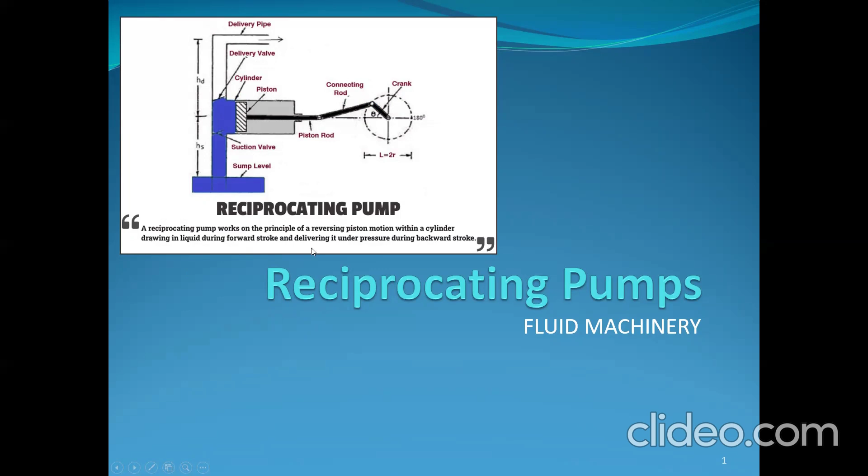Reciprocating pumps - here in the pictures are the pump parts. A reciprocating pump works on the principle of a reversing piston motion within a cylinder, drawing in liquid during the forward stroke and delivering it under pressure during the backward stroke.

Introduction. There are two main types of pumps, namely dynamic and positive displacement pumps. Dynamic pump consists of centrifugal, axial, and mixed flow pump. In these, pressure is developed by the dynamic action of the impeller on the fluid, and momentum is imparted through this dynamic action.

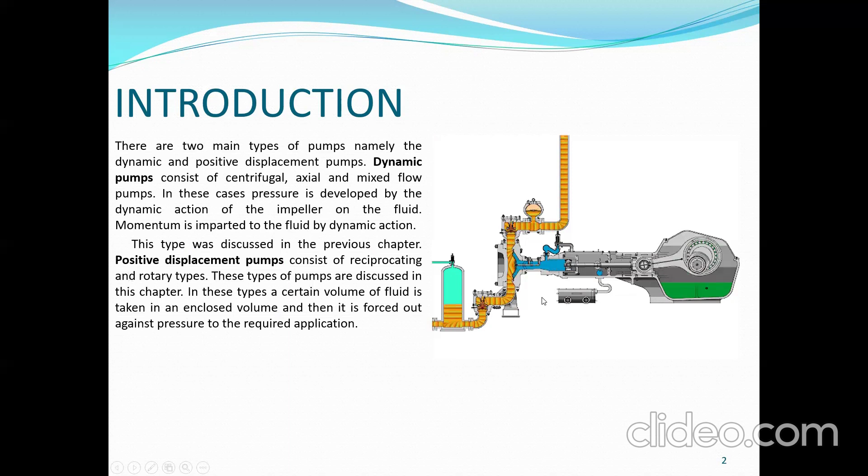This type was discussed in the last topic. Positive displacement pump, as shown, consists of reciprocating and rotary types. This type of pump is discussed in this topic. Here, a certain volume of fluid is taken into an enclosed volume, and then it is forced out against pressure to the required application.

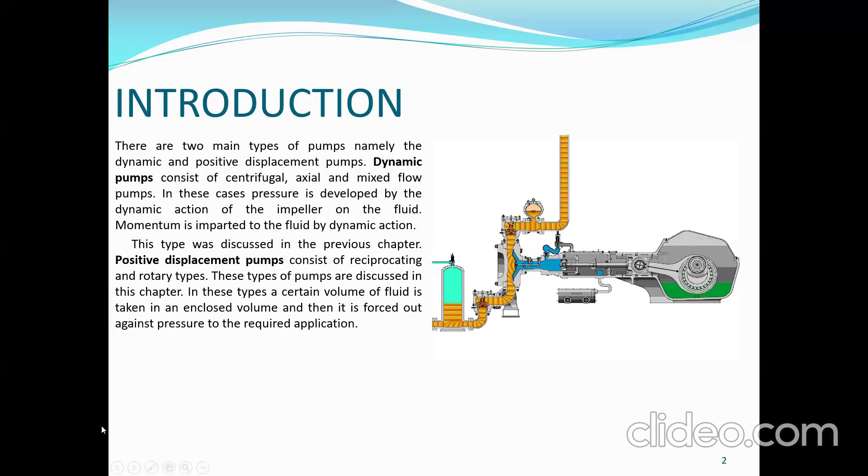Description and working principles. The main components are: one, cylinder with suitable valves.

The valves - delivery valves, inlet valves - put here, connecting rod, and air vessel. This is the air vessel, for expansion and contraction.

Two, plunger or piston with piston ring - here, the piston ring prevents leaking. Then connecting rod and crank mechanism - remember your machine elements.

Four, suction pipe with one-way valve - here's the suction pipe, and its one-way valve is the foot valve. Delivery pipe - here's the discharge. Air vessel reduces flow fluctuation and reduces acceleration head and friction head.

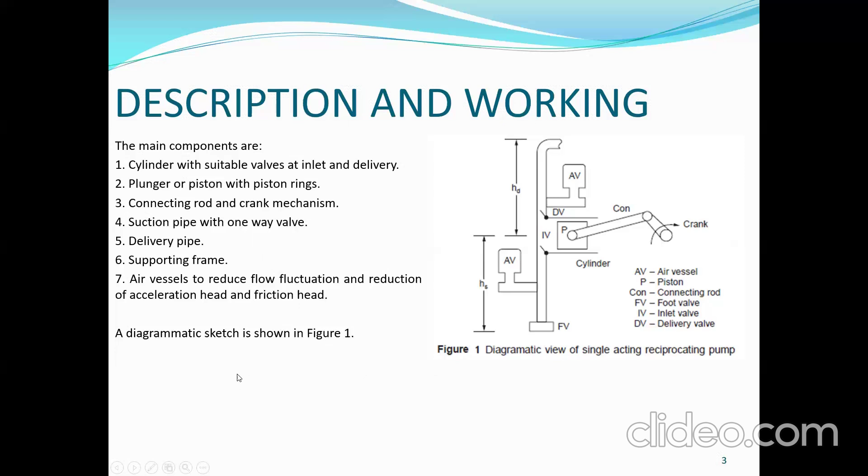So a diagrammatic sketch is shown in Figure 1. The action is similar to that of a reciprocating engine.

As the crank moves outward, the piston moves out, creating suction in the cylinder. Due to the suction, water or fluid is drawn into the cylinder through the inlet valve. The delivery valve will be closed during this outward stroke.

During the return stroke, as the fluid is incompressible, pressure develops immediately, which opens the delivery valve or discharge valve and closes the inlet valve. During this return stroke, fluid is forced out of the cylinder against the delivery side pressure.

The functions of the air vessel will be discussed in a later section. The volume delivered per stroke is the product of piston area times stroke length. In a single acting type of pump, there is only one delivery per stroke per revolution - one side only.

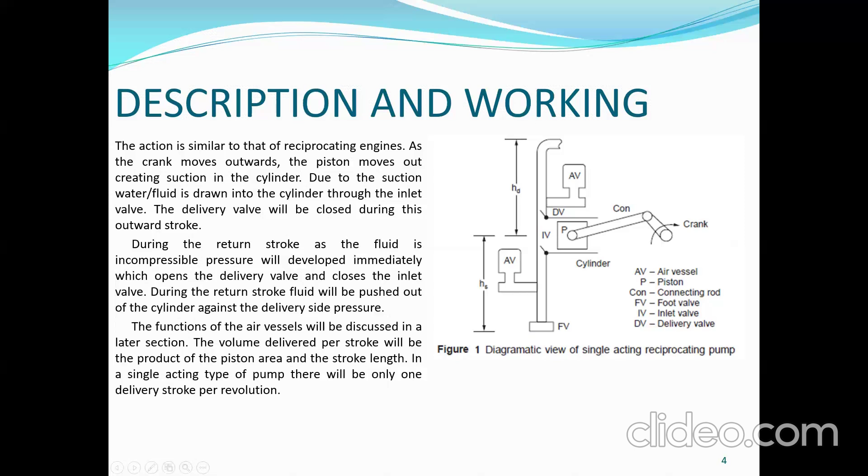Suction takes place during half a revolution and delivery takes place during the other half. As the piston speed is not uniform while the crank speed is uniform - since the piston motion is linear - the discharge will vary with the position of the crank.

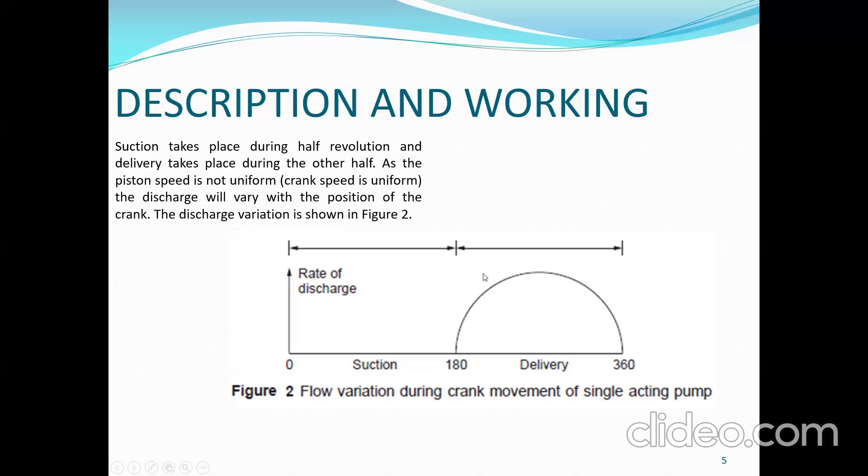As shown in Figure 2, the discharge variation or rate of discharge - in a single acting pump, the flow will be fluctuating because of this operation. This fluctuation can be reduced to some extent by a double acting pump or multi-cylinder pump, since it gets balanced.

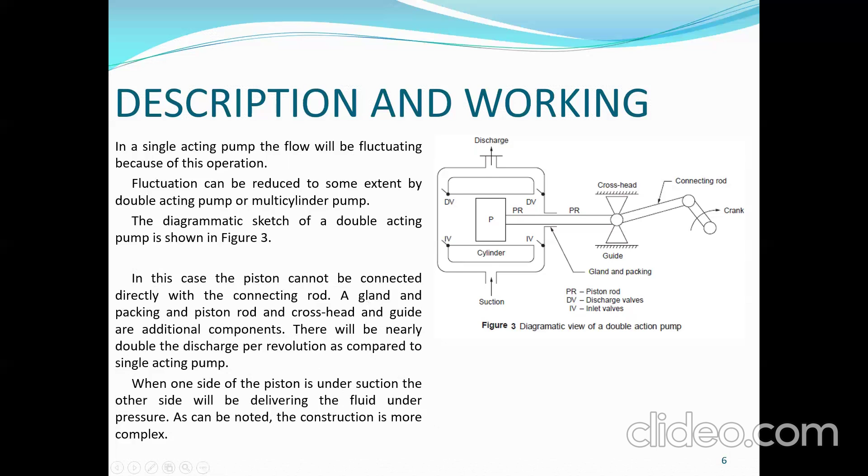A gland and packing, piston rod, and crosshead and guide are additional components. There will be nearly double the discharge per revolution compared to a single acting pump, since the volume is doubled. When one side of the piston is under suction, the other side will be delivering fluid under pressure. As can be noted, the construction is more complex.

Next, the flow rate and power. The theoretical flow rate per second for a single acting pump is given by Q = LAN/60 cubic meters per second, where L is the length of stroke, A is the cylinder or piston area, and N is the revolutions per minute. That's the reason we have 60, because the output is in cubic meters per second while N is in RPM, which is per minute.

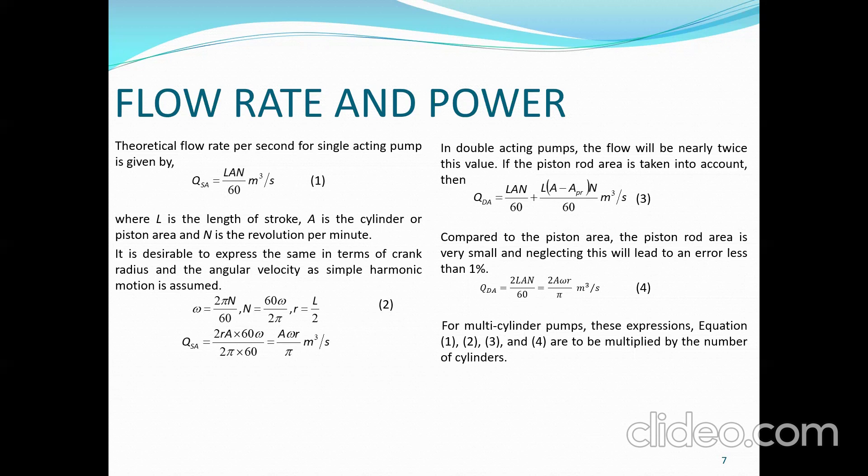Next is slip. Slip kasi may nag-ano siya, may velocity. There can be leakage along the valve, piston rings, gland, and packing, which will reduce the discharge to some extent. So this is accounted for by the term slip, yung reduction yan. Percentage of slip is QTH minus QAC over QTH times 100%, where QTH is the theoretical discharge given by equation 1 and 2, and QAC is the measured discharge, actual. The coefficient of discharge CD is equal to QAC over QTH.

Theoretical power now is mg times HS plus HD, in watts. Okay, hindi yan times W, in watts. Okay, ano? MGH. Okay, correct, that this is mg times HS plus HD in watts.

Okay, so it has been found in some cases that QAC is greater than QTH due to operating conditions. In this case, this slip is negative slip. When the delivery pipe is too short or the delivery head is small, discharge head, delivery means discharge, is small, and the accelerating head in the suction side is high, the delivery valve is found to open before the end of the suction stroke and the water passes directly into the delivery pipe. Such a situation leads to negative slip.

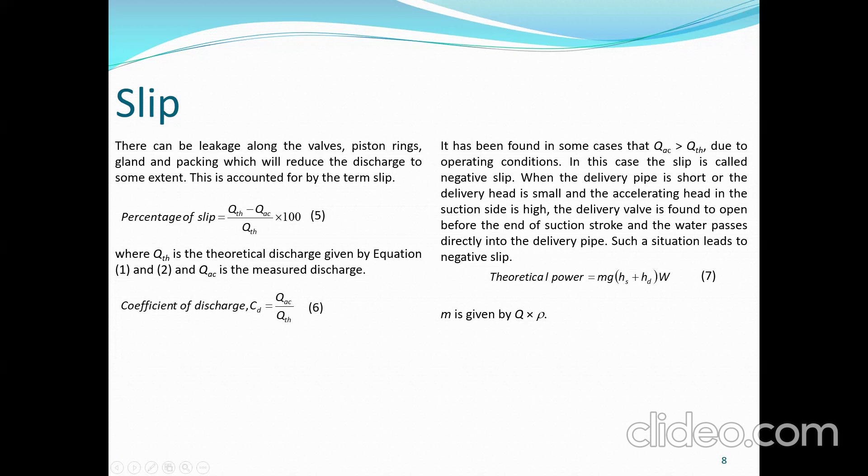Yan, so example number 1. A single acting reciprocating pump has a bore of 200 mm and a stroke of 350 mm and runs at 45 RPM. The suction head is 8 meters and the delivery head is 20 meters. Delivery means discharge head. Determine the theoretical discharge of water and the power required. If the slip is 10%, what is the actual flow rate?

So given, bore is D is equal to 200 mm or 0.2 meters. Stroke is L is 350 mm or 0.35. N is equal to 45 RPM. HS is 8 meters, HD is 20 meters. Slip is 10% or 0.1. Required: theoretical discharge QTH, power required, and actual flow rate QAC.

So theoretical volume, solution, QTH equal to LAN over 60 is equal to 0.35 times pi over 4 times 0.2 squared times 45. So Q is equal to 8.247 times 10 exponent negative 3 cubic meter per second, times 8.247 liters per second. So the power is mg times HS plus HD is equal to 1 minus 0.1 times 8.247 times 9.81 times 20 plus 8. Oops, okay wait, tara may mali sa ano to.

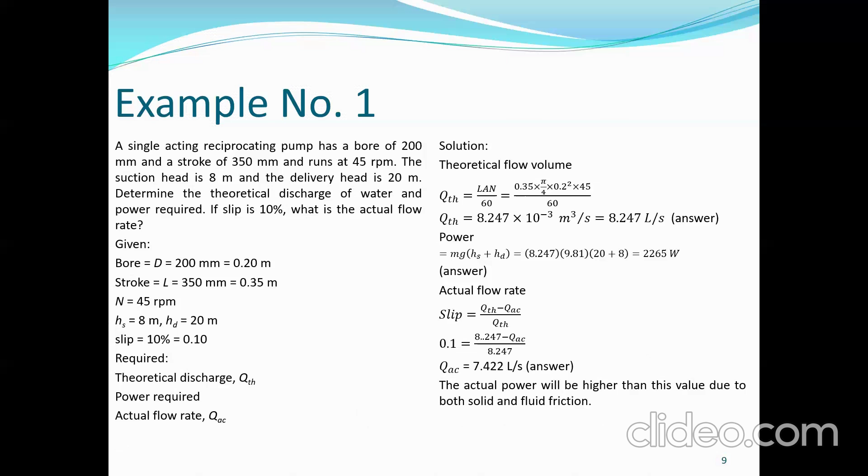Example yata to, pero yun ang mali niya doon. Kasi power, ano siya eh, power input.

Example sa book. Next, example number 2. A double acting reciprocating pump has a bore of 150 mm and a stroke of 250 mm and runs at 35 RPM. The piston rod diameter is 20 mm, the suction head is 6.5 meters, and the delivery head or discharge head, other reference, other books, is 14.5 meters. The discharge of water was 4.7 liters per second. Determine the slip and the power required.

Given bore D is 150 mm or 0.15 meters, stroke L is 250 mm or 0.25 meters, and N is 35 RPM. Piston rod diameter is 20 mm, equal to 0.02 meters. HS is 6.5 meters, HD is equal to 14.5 meters, QAC is equal to 4.7 liters per second. Required the slip and the power required. Solution. So this is a double acting pump.

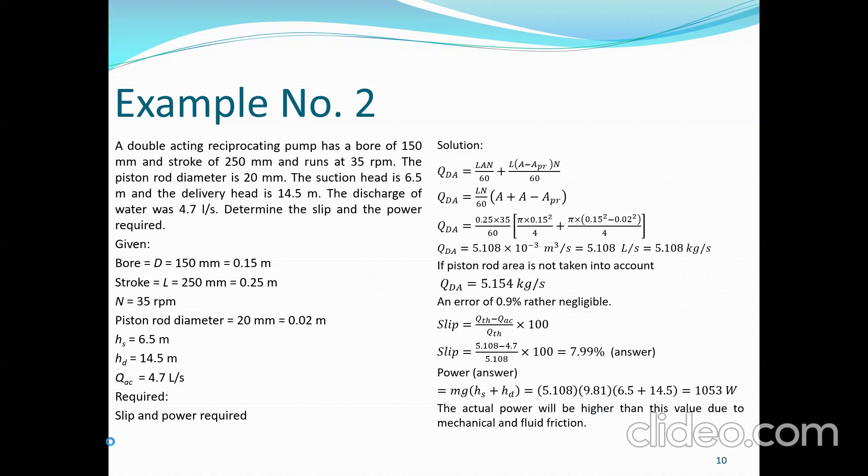Next, indicator diagram. So the pressure variation in the cylinder during a cycle consisting of one revolution of the crank, when represented in a diagram, is termed as indicator diagram. The same is shown in figure 4. So andyan yung

HT, atmospheric pressure, plus what G? HD is equal to delivery pressure or discharge pressure, and HS is the suction pressure. Suction is below atmosphere kadalasan. So the figure represents an ideal diagram assuming no other effects are involved except the suction and delivery pressure.

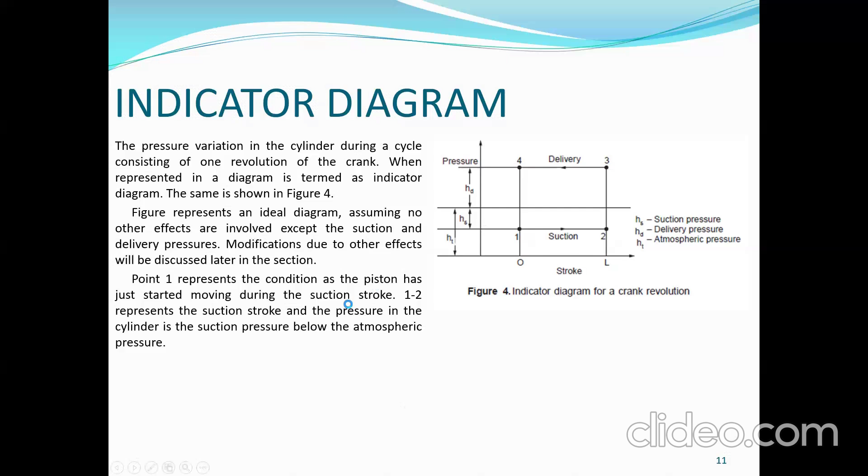Modification due to other effects will be discussed later. So point 1 represents the condition as the piston has just started moving during suction. So 1 to 2 represents the suction stroke, and the pressure in the cylinder is the suction pressure below atmospheric pressure. So, di pa siya nag-increase. Suction siya, papasok pa lang. Point 3 represents the condition just as the piston has started moving when the pressure increases to the delivery pressure.

So, nag-move na siya, compress siya. Along 3 to 4, representing the delivery stroke, the pressure remains constant. So, discharge na siya. The area enclosed represents the work done during a crank revolution to some scale. So, siyempre yung scale mo, para makuha mo yung area, susukatan mo lang siya.

So, power is equal to Q rho G times HS plus HD, is equal to rho G LAN times HS plus HD over 60. Take note, ang rho mo dyan, ang unit is kilogram per cubic meter or slugs per cubic foot. Okay? Pag rho G or gamma, equivalent sa gamma, weight density, that is pounds per cubic foot or newtons per cubic meter.

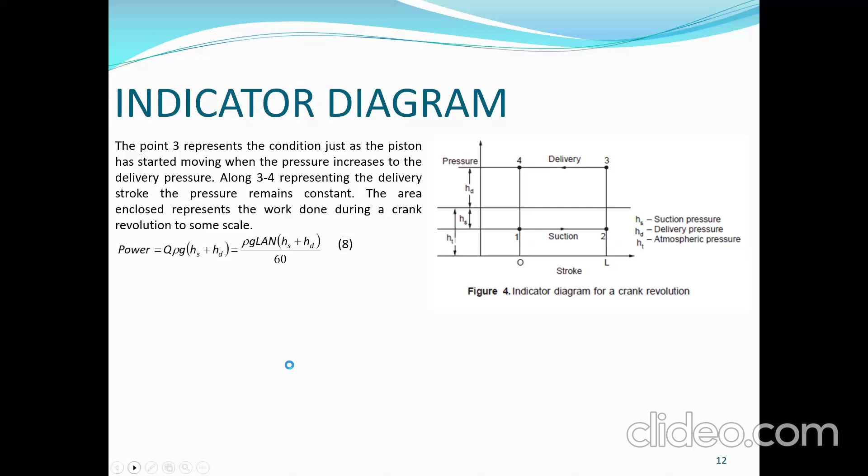Next is the acceleration head. This is needed for the actual performance of the reciprocating pump. The piston and the reciprocating pump has to move from rest when it starts the suction stroke, hence it has to accelerate. The water in the suction pipe, which is also not flowing at this point, has to be accelerated.

Such acceleration results in a force which when divided by area results in pressure. When the piston passes the midpoint, the velocity gets reduced, so there is retardation of the piston together with the water in the cylinder and the pipe.

This again results in pressure. These pressures are called acceleration pressure and noted as head of fluid, h, equal to P over rho G for convenience. Referring to figure 5 shown below, the following equations are given.

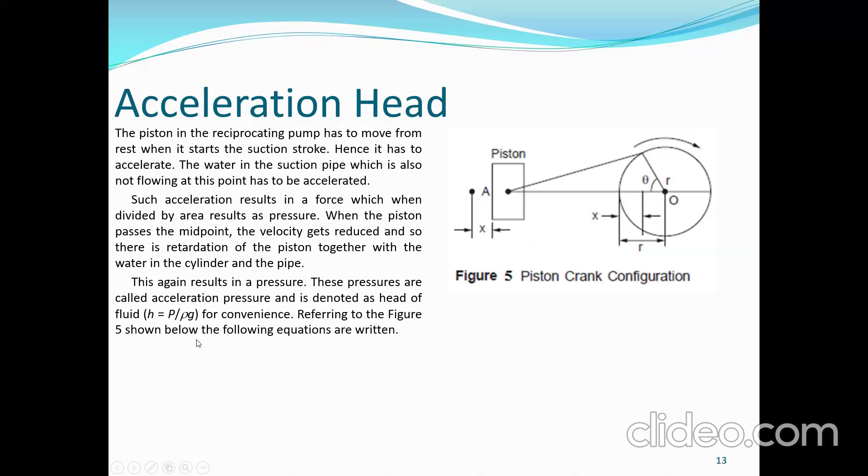Let omega be the angular velocity, then at time t, the angle traveled theta is omega t. So distance x equals r minus r cosine theta. The velocity at this point, v, equals dx over dt, equals r omega sine omega t. Now the acceleration at this point, x double dot, equals dv over dt, equals omega squared r cosine omega t.

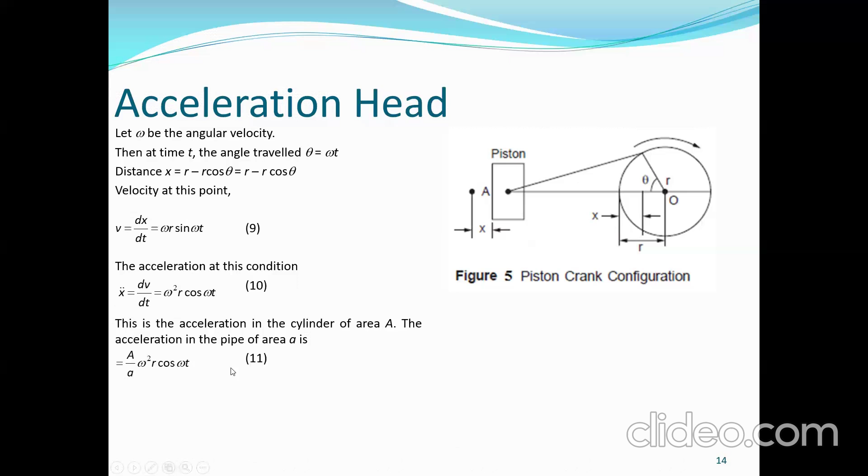Acceleration force is equal to mass times acceleration. The mass in the pipe is rho A L, equal to gamma A L over G — we take the value for the pipe. So acceleration force is gamma A L over G times A over a, omega squared r cosine omega t.

Now pressure equals force over area, so it equals the acceleration force, gamma L over G times A over a, omega squared r cosine omega t, over A. So pressure is gamma L over G times A over a, omega squared r cosine theta. Head now is pressure over gamma, so h_a, the acceleration head, equals L over G times A over a, omega squared r cosine theta.

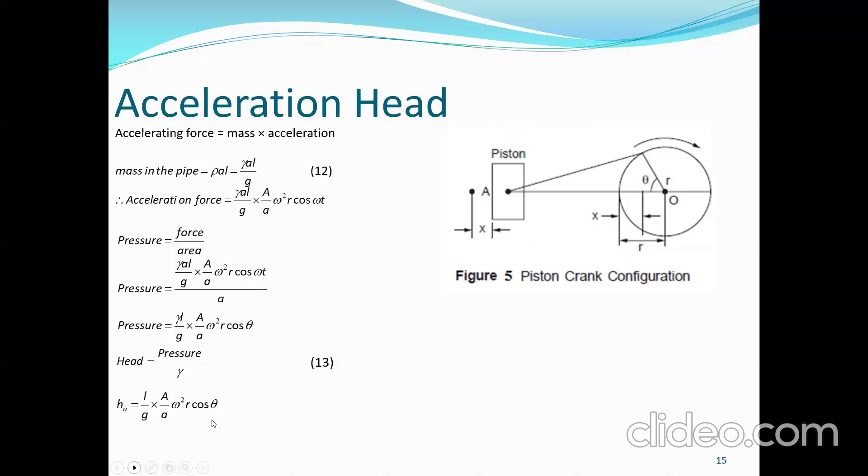Note that gamma over g is rho. This head is imposed on the piston in addition to the static head at that condition, so it adds on. This results in the modification of the indicator diagram as shown in figure 6.

At the beginning of the suction stroke, theta equals 0, cosine theta is 1. So h_as is l_s over g times A over a_s, omega squared r. This is over and above the static suction head, hence the pressure is indicated by 1' in the diagram.

At the middle of the stroke, theta is 90 degrees, so h_as is equal to 0 — there is no additional acceleration.

At the end of the stroke, theta is 180 degrees, cosine theta is -1, so h_as equals negative l_s over g times A over a_s, omega squared r. Since it's negative, this reduces the suction head, hence the pressure is indicated at 2' in the diagram. The h_as value is positive while the value at the end becomes negative.

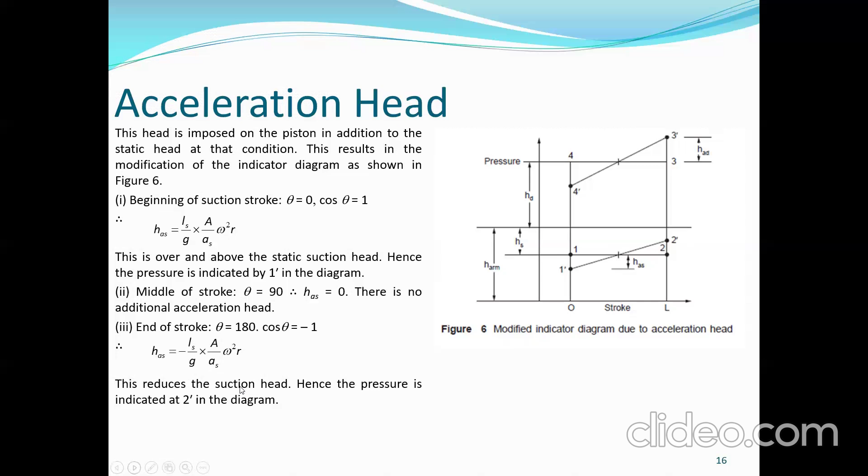Similarly, during the beginning of the delivery stroke at point 3, theta is 0, so cosine theta is 1. So H_AD equals L over G times A over a_D, omega squared r. This head is over and above the static delivery pressure, so the pressure is indicated by 3' in the diagram.

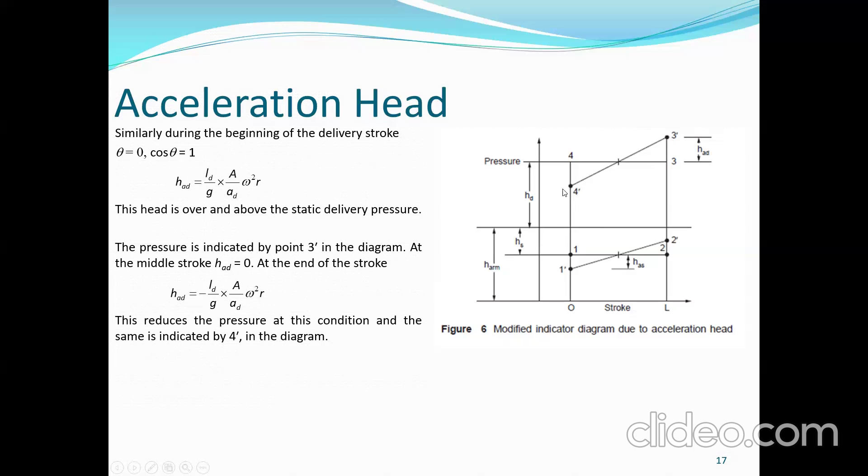Now, the effects of acceleration head are: first, no change in the work done. Second, suction head is reduced, leading to the problem of separation in the suction pipe, in case the pressure at point 1' is around 2.5 meters of head absolute, as the value depends on omega, which is directly related to the speed of operation. Because of this, the speed of operation of a reciprocating pump is limited.

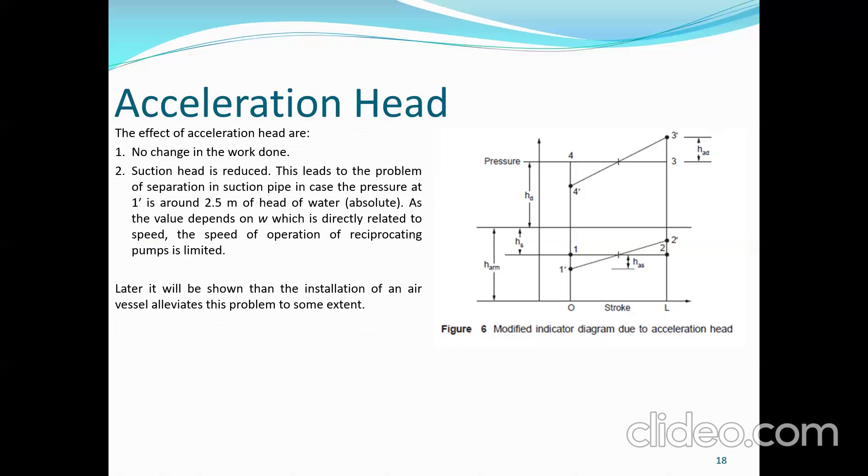Later, it will be shown that the installation of an air vessel alleviates this problem.

Example number 3: A single acting reciprocating pump of 200 mm bore and 300 mm stroke runs at 30 RPM. The suction head is 4 meters and the delivery head is 15 meters. Considering acceleration, determine the pressure in the cylinder at the beginning and end of the suction and delivery stroke. Take the value of atmospheric pressure as 10.3 meters of water head.

Take note: atmospheric pressure is equivalent to 14.7 psi or 101.325 kilopascals, expressed here in meters of water head. The length of the suction pipe is 8 meters and that of the delivery pipe is 20 meters.

So the pipe diameters are 120 mm each, for both the delivery and suction pipe. Given: LS is 8 meters, LD is 20 meters, piston diameter D is 200 mm or 0.2 meters. So capital D is our piston diameter. Pipe diameter DS equals 120 mm or 0.12 meters. Stroke L equals 300 mm or 0.3 meters. HS is 4 meters, HD is 15 meters, H atmospheric is 10.3 meters.

So wait, okay, let me change this. DD is equal to 120 mm or 0.12 meters.

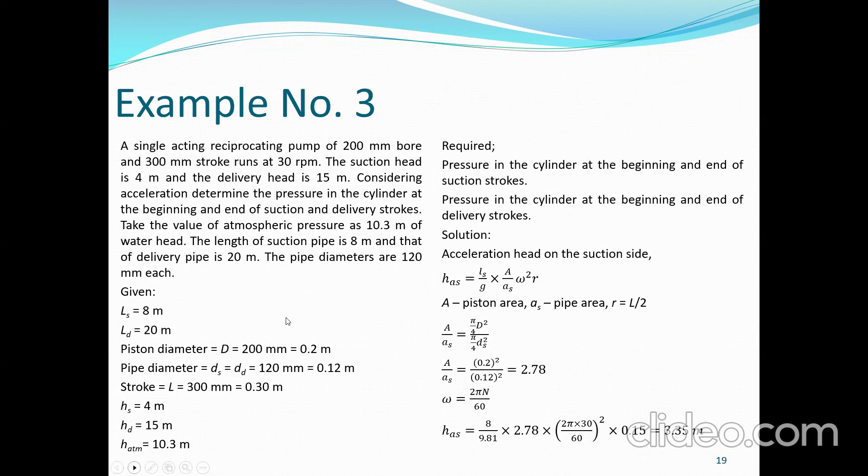So that's 7.35 meters vacuum. How? 2.95 minus 10.3 is negative 7.35 meters, so that's negative, which we call vacuum, or 7.35 meters vacuum. At the end of the stroke, HES equals H atmospheric minus HS plus HAS, equal to 10.3 minus 4 plus 3.35, which is 9.65 meters absolute, or 9.65 minus 10.3 is negative 0.65 meters, so that becomes 0.65 meters vacuum.

Next, on the discharge side, HAD equals LD over G times A over AD times omega squared times R. A over AD equals 0.2 squared over 0.12 squared, which is 2.78. LD is 20, divided by 9.81, times 2.78, times (2 pi times 30 over 60) squared, times 0.15, equals 8.38 meters.

Now at the start of delivery: HBD equals H atmospheric plus HD plus HAD, equal to 10.3 plus 15 plus 8.38, which is 33.68 meters absolute, minus 10.3 gives 23.38 meters gauge, not vacuum. At the end of delivery, HED equals H atmospheric plus HD minus HAD, equal to 10.3 plus 15 minus 8.38, which is 16.92 meters absolute, or 6.62 meters gauge.

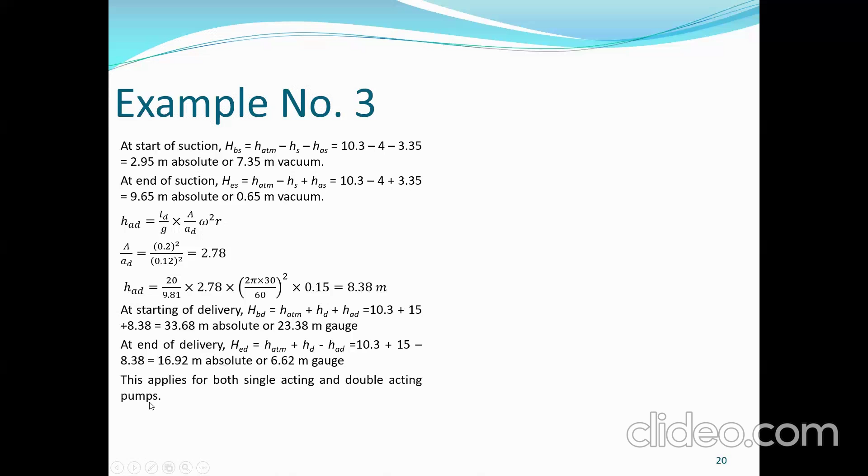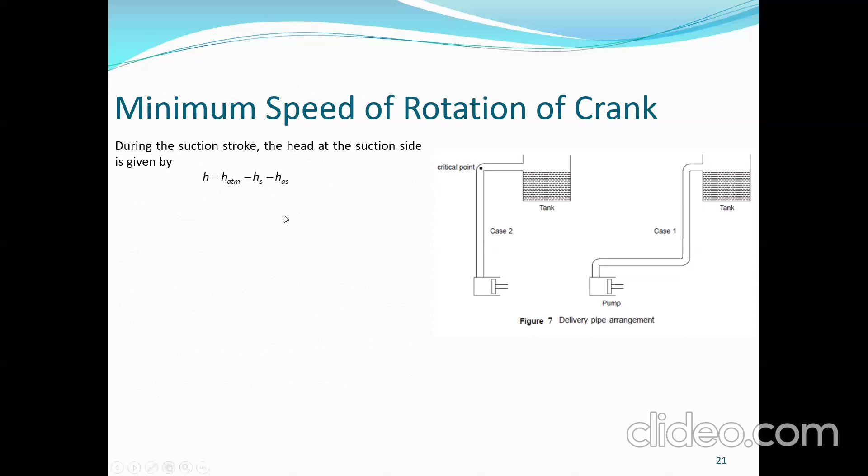Then, minimum speed of rotation of crank. During the suction stroke, the head at the suction side is given by H equals H atmospheric minus HS minus HAS. On the suction side, in case this head is below 2.5 meters of head of water, the water may vaporize at this point and the flow will be disrupted, causing separation in the liquid column, then pumping will discontinue. So in order to avoid this, the acceleration head, which can be changed, should be limited.

As this depends on the speed, there is a limitation to the operating speed — it is the minimum speed. During the delivery stroke, there is a possibility of separation caused by the layout of the delivery pipe. Two alternatives are shown in figure 7. The first method is to have a horizontal bend at the pump level and then a vertical line. So, case 1 and case 2.

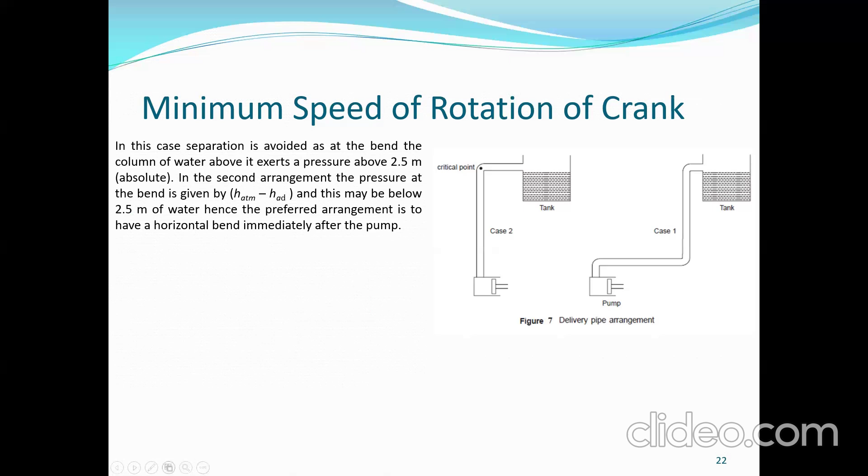Example number 4: A single acting reciprocating pump of 200 mm plunger diameter and 300 mm stroke length has a suction head of 4 meters. The suction pipe diameter is 110 mm and is 9 meters long. The pressure at the beginning of the suction should be above 2.5 meters water column absolute to avoid separation. Determine the highest speed at which the pump can operate.

Given: plunger diameter D is 200 mm or 0.2 meters. Stroke 2R is 300 mm or 0.3 meters. Suction pipe diameter DS is 110 mm or 0.11 meters. Length of suction pipe LS is 9 meters. Pressure at the beginning of the suction stroke is 2.5 meters absolute. Required: the highest speed at which the pump can operate. Solution.

At the beginning, the pressure required is 2.5 meters. This equals the difference between the atmospheric pressure and the sum of suction and accelerating head.

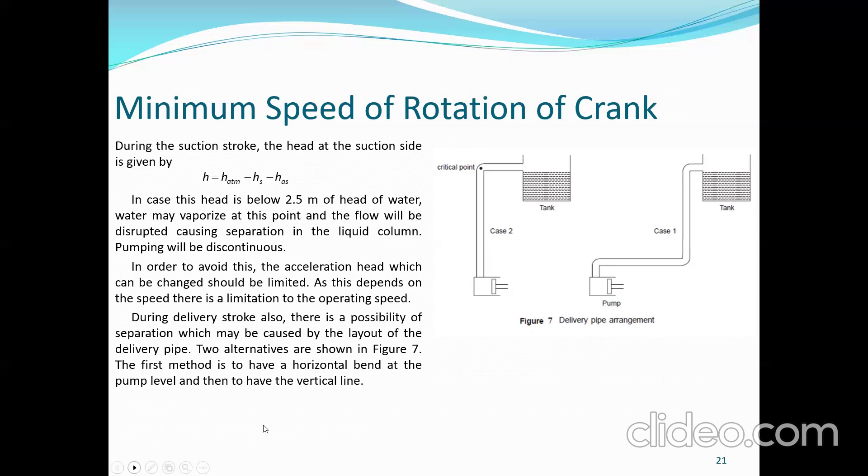Then H equals H atm minus HS minus HAS. 2.5 is 10.3 minus 4 minus HAS. So HAS is equal to 3.8 meters.

HAS equals L over G times A over a, omega squared R. So A over a is pi over 4 D squared over pi over 4 DS squared, which becomes D squared over DS squared. Substituting: 3.8 equals 9 over 9.81 times (0.2 over 0.11) squared times omega squared times 0.15.

Solving for omega squared gives 8.353, so omega is 2.89 radians per second.

So this is now the highest speed. If it increases, this goes down; if it increases further, it becomes less than 2.5. This is the highest speed at which the pump can operate.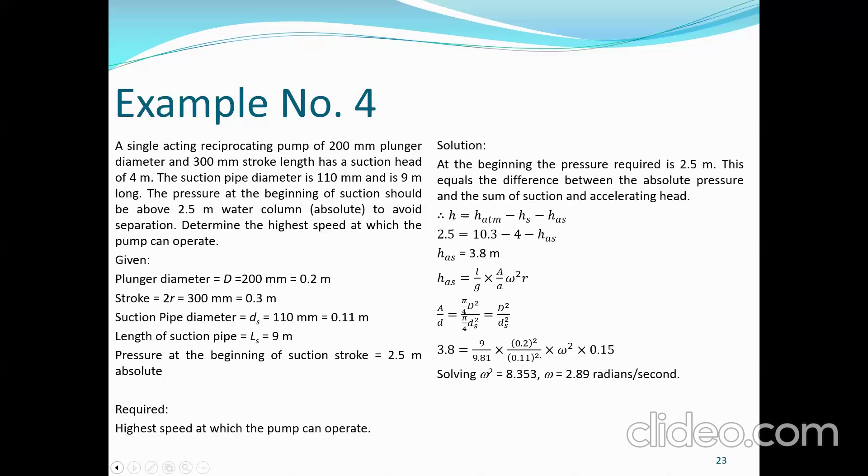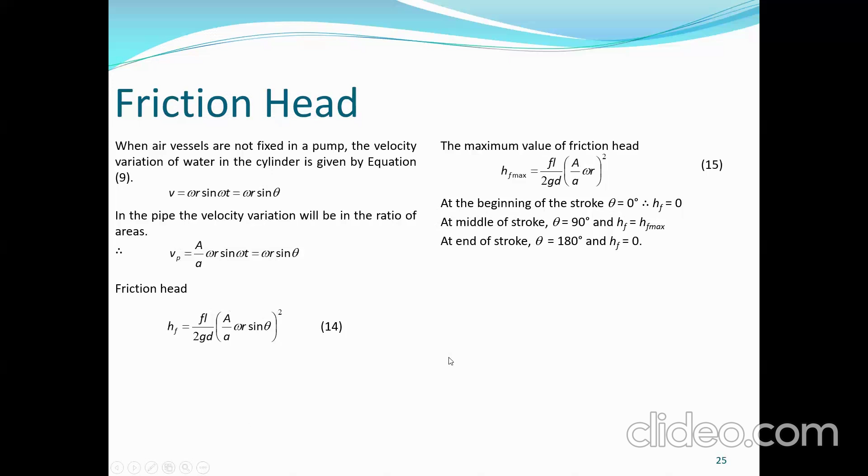At the beginning of the stroke, theta equals 0 degrees, HF is 0. At the middle of the stroke, it's 90 degrees—that's the maximum, HF equals maximum. At the end of the stroke, theta is 180 degrees, HF is 0. You also add this to the friction heads.

Now, friction head leads to another modification of the indicator diagram shown in figure 8, where HS and HD are static suction and delivery heads. The pressure at various locations is indicated below.

Suction head at the start: HS plus HAS, since HF is 0 here. At the middle position: HS plus HFS for suction, since there's no HAS there, it's 0. So at the end: HS minus HAS.

For the delivery stroke, at the start HD plus HAD. At the middle position, HD plus HF. At the end, head equals HD minus HAD.

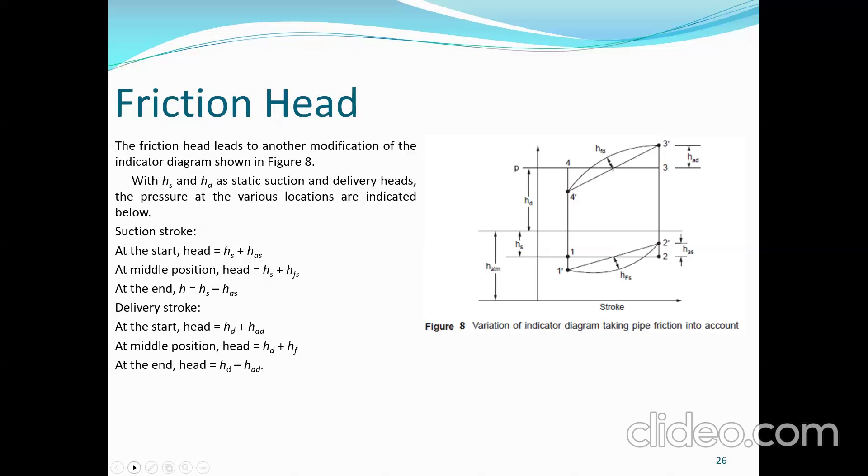It can be observed that friction head increases the work done, as seen by the increased area enclosed in the indicator diagram. The introduction of air vessel will reduce the friction work considerably.

In order to calculate the work done, it will be desirable to calculate the average friction head. As the variation is parabolic, the average is found to be 2/3 of the maximum. So HF average is 2/3 of HF maximum.

So the total head against which work is done, HTO, equals HS plus HD plus 2/3 of HF max on the suction side plus 2/3 of HF max on the discharge or delivery side. The additional work due to friction is given by 2/3 Q rho G times (HFS plus HFD).

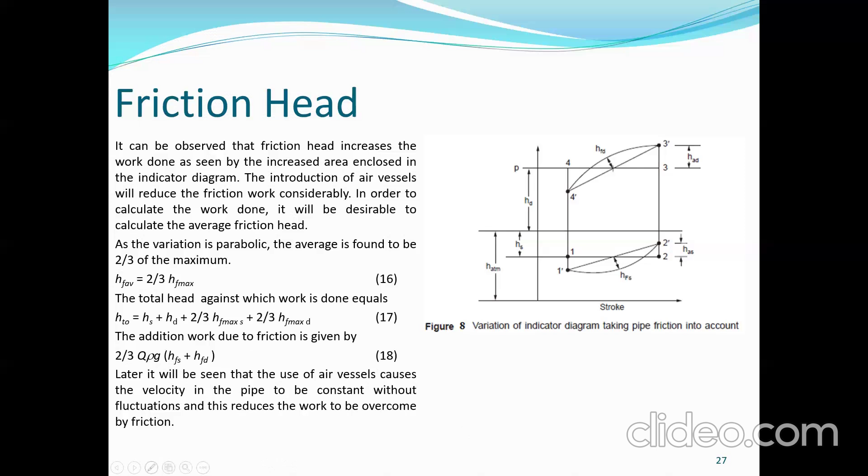Later, it will be seen that the use of an air vessel causes the velocity in the pipe to be constant without fluctuation, and this reduces the work needed to overcome friction. So that work is eliminated. That's the air vessel.

Air vessel is a strong closed vessel as shown in the figure. This is also called an expansion tank - if closed type, a pressurized closed expansion tank, of the diaphragm type.

The top half contains compressed air and the lower portion contains water or the fluid being pumped. Air and water are separated by a flexible diaphragm which can move up or down depending on the difference in pressure between the fluids. So the air is charged at near total delivery pressure, suction pressure from the top, and is sealed.

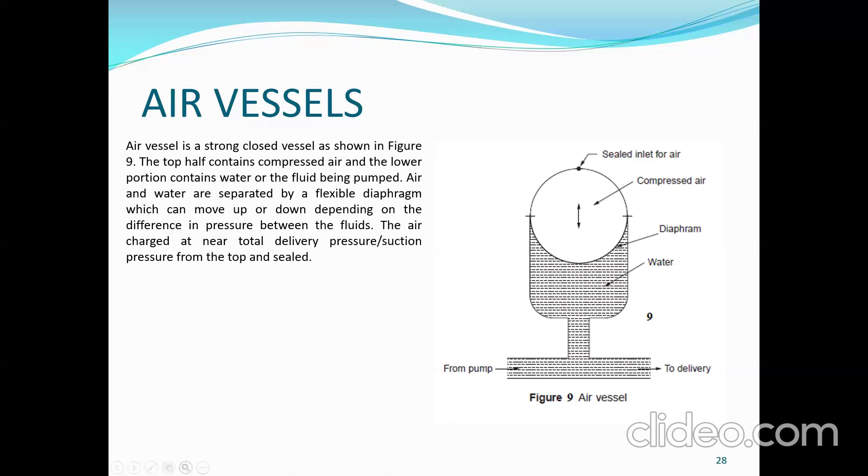Next is the rotary displacement pump. This one has an animation, okay.

In order to avoid the complexity of construction and restriction on the speed of reciprocating pumps, rotary positive displacement pumps have been developed. These can run at higher speed and produce moderately high pressure. These are very compact and can be made for very low delivery volumes. These are extensively used for pumping lubricants to engine parts and oil hydraulic control systems. These are not suited for water pumping. Some types described in this section are gear pump, lobe pump, and vane pump.

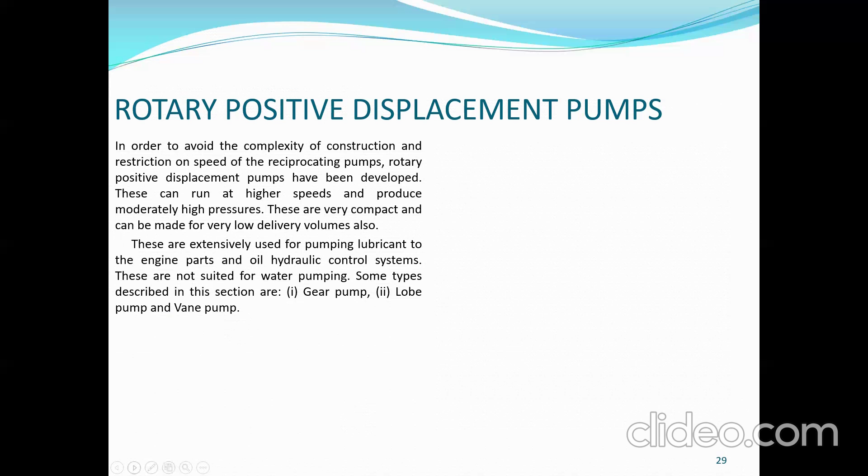So that's not suitable for water pumping, only for oil - hydraulic oil. Gear pump: these are used more often for oil pumping. A gear pump consists of, see the figure, two identical mating gears and a casing.

The gears rotate as indicated in the sketch. Oil is trapped in the space between the gear teeth and the casing. The oil is then carried from the lower pressure or atmospheric pressure side and is delivered to the pressure side. The two sides are sealed by meshing teeth in the middle. The maximum pressure that can be developed depends on the clearance and viscosity of the oil.

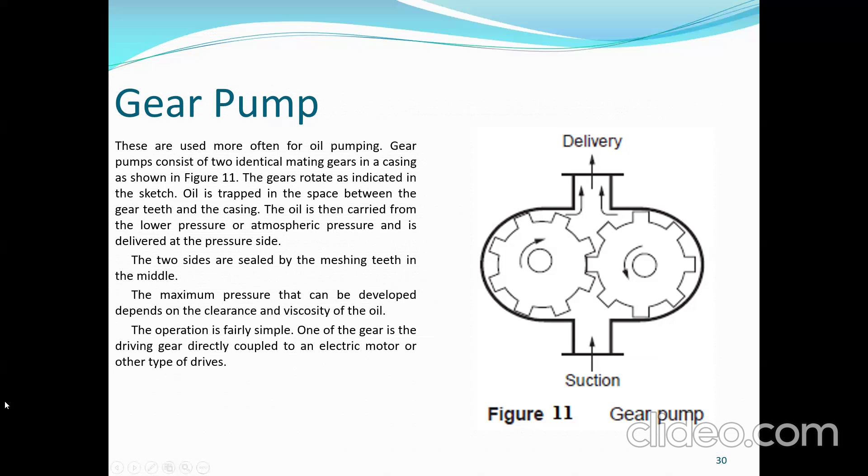The operation is fairly simple. One of the gears is the driving gear, directly coupled to an electric motor or other type of drive. This pump should be filled with oil before starting. The sketch shows an external gear pump.

There is also another type of gear pump called the internal gear pump. This is a little more compact, but the construction is more complex and involved, and hence used in special cases where space is a premium. Next, the lobe pump.

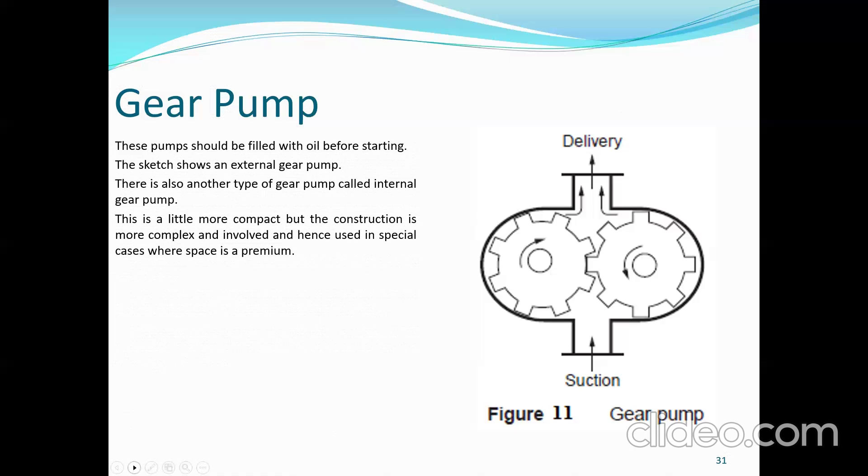2-lobe pumps are also possible. The gear teeth are replaced by lobes. Two lobes are arranged in a casing.

As the rotor rotates, oil is trapped in the space between the lobe and the casing and is carried to the pressure side. Helical lobes along the axis are used for operation. Oil is required to be filled before starting the pump.

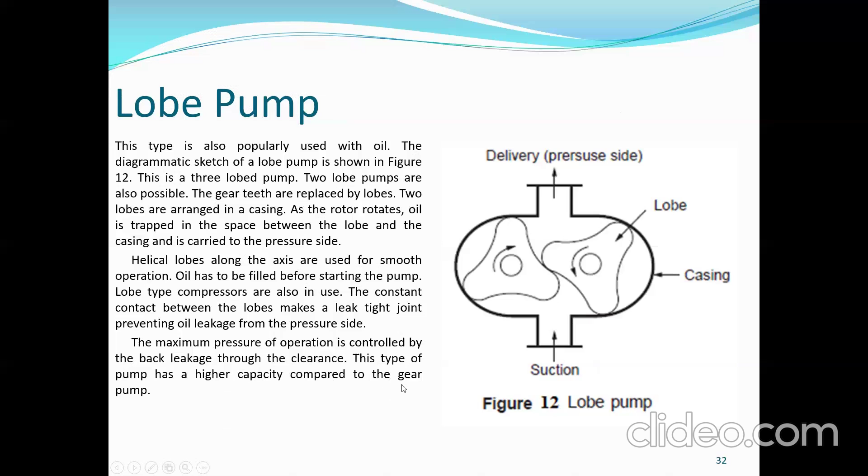Lobe-type compressors are also in use. The constant contact between the lobes makes a leak-tight joint, preventing oil leakage from the pressure side. The maximum pressure of operation is controlled by the back leakage through the clearance. This type of pump has a higher capacity compared to the gear pump.

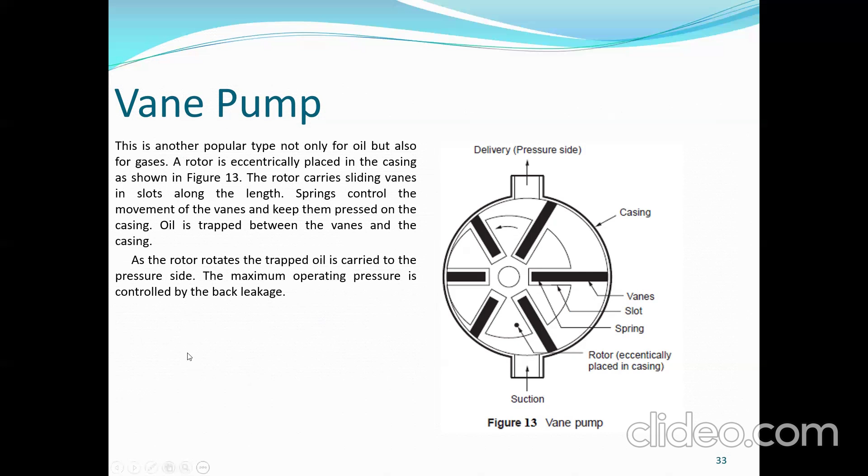The spring controls the movement of the vanes and keeps them pressed on the casing. Oil is trapped between the vanes and the casing. As the rotor rotates, the trapped oil is carried to the pressure side. The maximum operating pressure is controlled by the back leakage. This is the end of this topic.